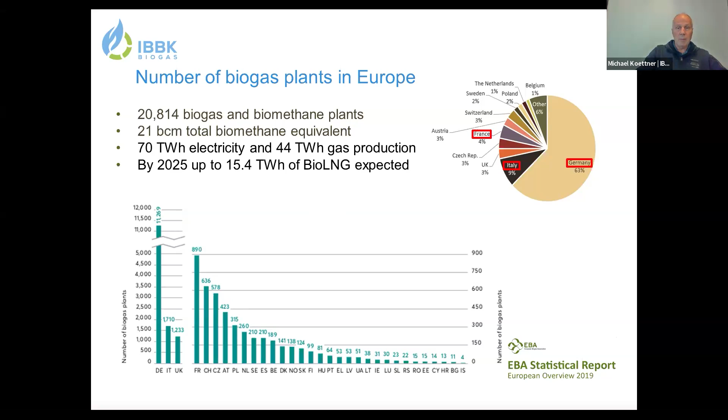So what does the feedstock look like in Europe and in the main biogas-producing countries - Germany, UK, and Italy? The feedstock mainly comes from agriculture, and then sewage sludge, then landfill, then industry. Agriculture means manure, liquid and solid manure.

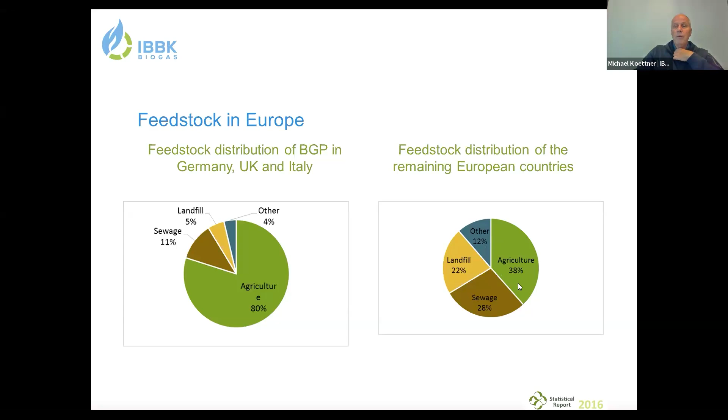But it also means energy crops. And also it means agricultural residues like straw or like byproducts or like spoiled harvests and stuff like that. So that's where most of the energy comes from, not so much in the other European countries where there is still a lower uptake of biogas, and therefore we have sewage and landfill and industry with a much bigger share, but of course the overall production is much smaller.

How does it look with the energy and the number of plants? The energy you can see here is coming from agriculture mostly, 72%. Almost 3/4 of the energy comes from agricultural resources, and in 65% of the plants, agricultural substrates are used. This is also due to the fact that we use in Germany, in Italy, in the UK especially, a lot of energy crops, a lot of high-yielding energy crops, and this is due to change.

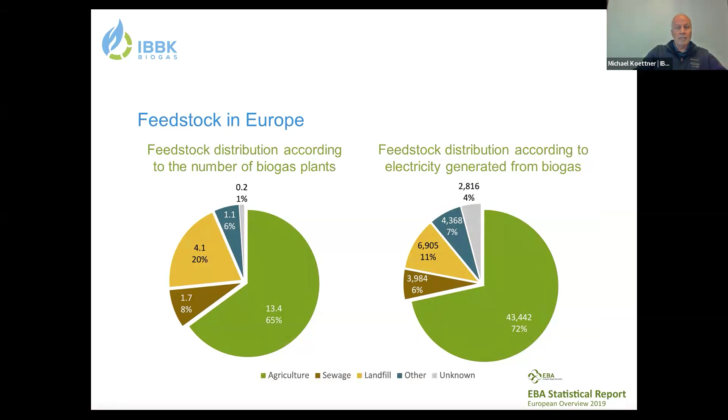And let's see what's happening next. But first, let's look at what has happened in the past. In different European countries, we had support schemes. Without that, it wouldn't have happened because electricity and gas from biogas is not yet competitive with market prices of natural gas and normal electricity. So therefore, we introduced a feed-in tariff, and in Germany that meant for 20 years you get a fixed tariff.

And of course, in the beginning, it's still good, but in the end, of course, you have higher costs, also inflation. So then it's not so suitable anymore, but also the plant is, of course, written off, so you still make good money. Also, feed-in premiums are paid. That means you have the base electricity or the base gas price, and then there's a top-up of a feed-in premium, which is then paid up to a certain threshold.

Quota systems weren't very successful with electricity production, but they seem to be more successful in the transport sector, especially in Germany. Even now we have a small problem that we have overfilled the quota, so to say, but this was due to a fraudulent influx of biodiesel from China. And it had an effect on the quota, and the quota price dropped. The price of CO2 dropped from 500 to 100. So this is 4 to 5 times less than was achieved before.

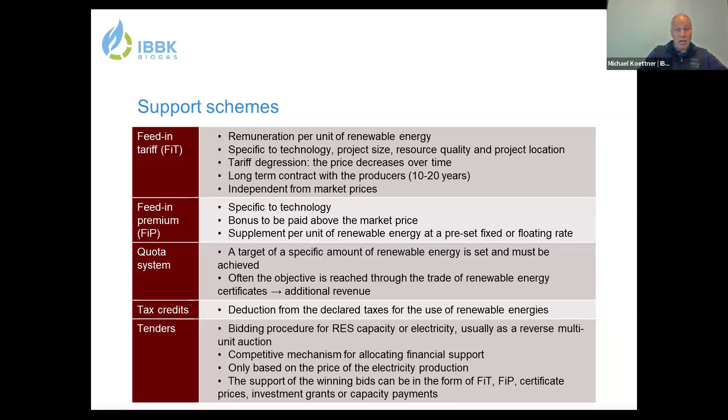In fact, we have 1,700 biogas plants at the moment which want to continue, and only about 550 were able to continue. So if nothing changes, we will have closing plants in Germany. Support schemes for biogas and biomethane were different per country. I will not go into details. You can see the different systems, and some countries have no support. Spain, for instance, has no support for biomethane, but is still a very much emerging market for biomethane. And their business model is to sell directly or sell to other markets like Switzerland and Germany.

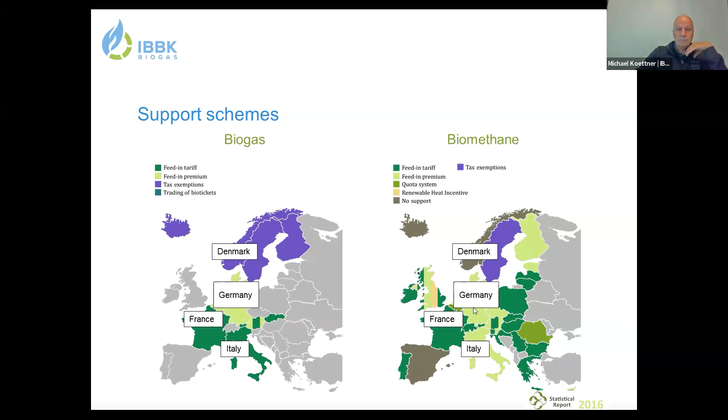Number of biogas and biomethane plants you can see here, and you can also see that biogas production is more or less stagnating since 2016, but the most increase is in the capacity of biomethane. It's actually growing at a rate of almost 20% per year. So that's good news. And the countries with the most biomethane plants are Germany, Italy, United Kingdom and France, and Denmark and Netherlands. All the other countries are still catching up or trying to organize themselves.

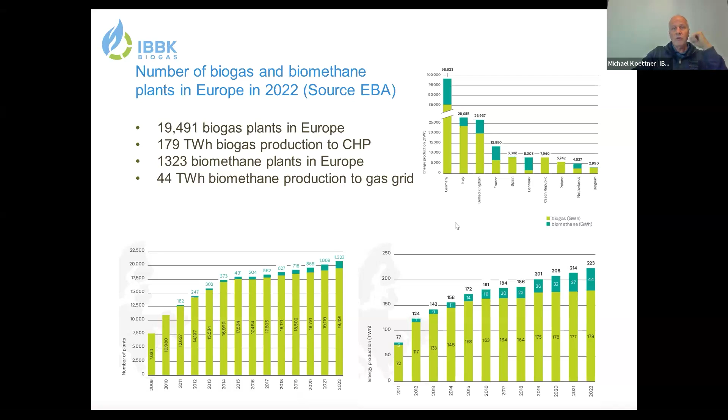Here you have an overview of where biomethane is produced in which country, and also the sizes of biomethane plants. You can see that Denmark, UK and Ireland, where there's only 1 or 2, have very big biomethane plants with 1,000 to 2,000 cubic meters per hour on average. And in France, where they have the most biomethane plants, almost 700 now, there's only an average of 200 cubic meters per hour. So very, very small plants.

They're not even catching up to Germany's 250 plants with an average of about 600 cubic meters per hour. So very small plants in France, medium-sized plants in Germany, and bigger plants in Denmark, UK, and Ireland. Emerging markets are Spain, Poland is even producing biomethane, and the Baltic states as well, even though they don't have their own support systems.

But this is due to the possibility of trading within Europe, and there's also going to be a big trading body coming up now, the so-called Union Database. A predecessor at the moment is ERGAR. That's a conjunction of different biogas registries. Those countries who already have registries are organized in ERGAR. This is Germany, Denmark, Netherlands, UK, Ireland, and Austria at the moment. All the other countries don't have registers, so therefore trade is difficult.

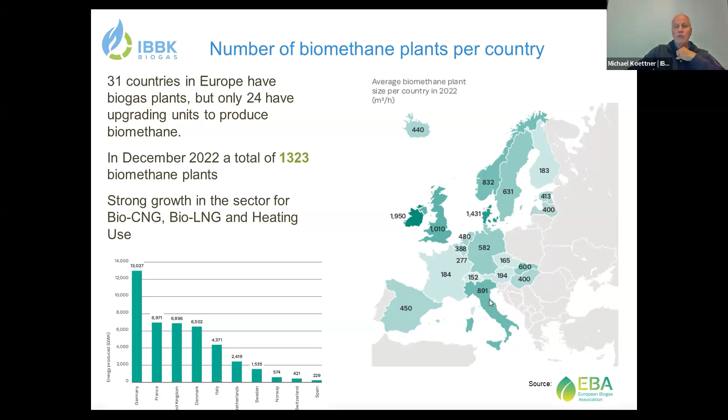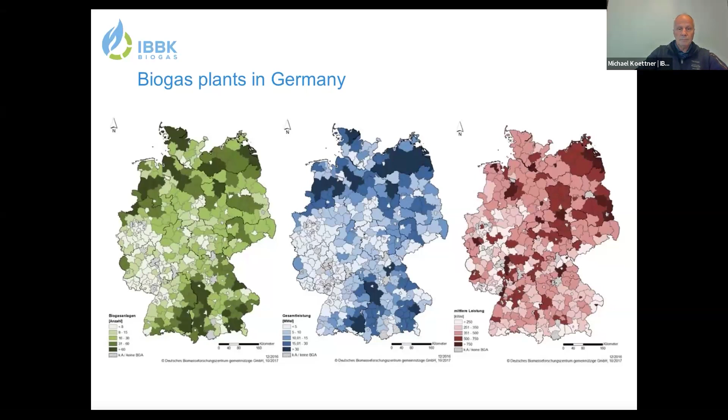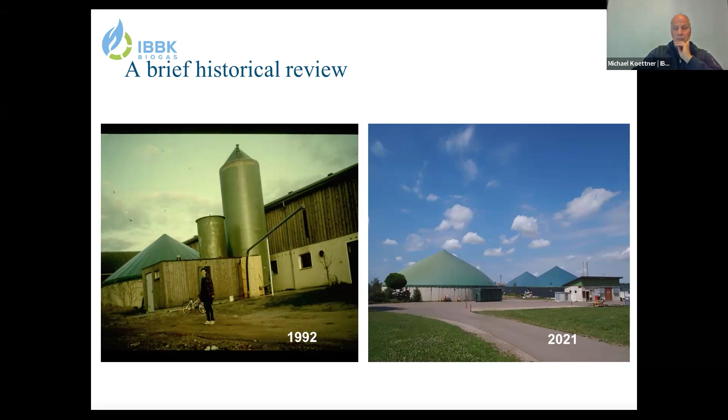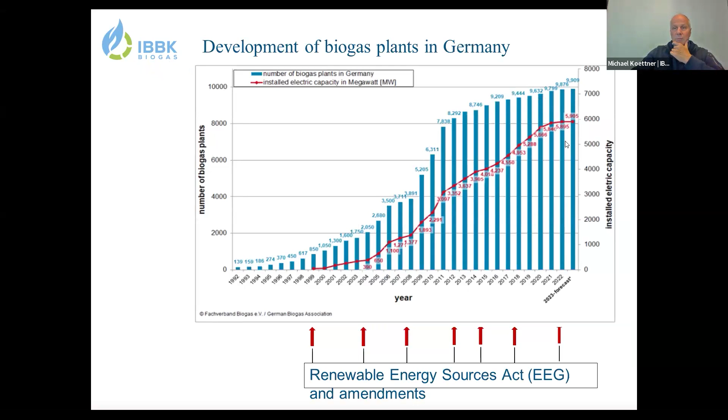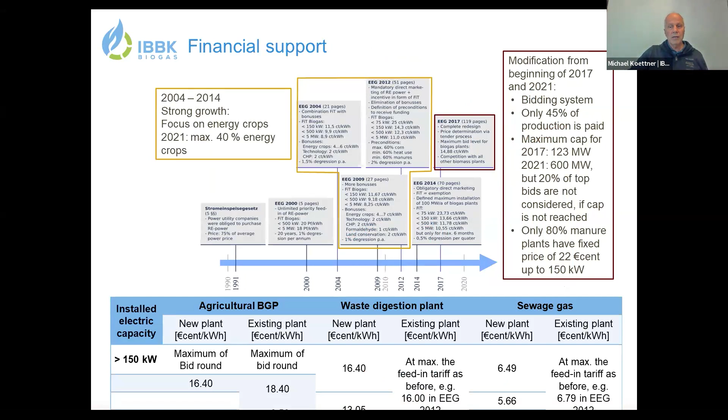There's the curve of Germany with different... there's not so much in the amount of biogas plants, but in the capacity of biogas plants. We will see later. Very complicated regulation. At first, when we started in 91, when I was just freshly coming to the Biogas Association and founding it, we had 5 paragraphs. Now we have many pages, I think 300 pages and 1,000 pages of comments. So it's become a thing of the lawyers, how to find your way through the jungle.

Not to be recommended. But interesting developments are that with electricity production, the capacity of biogas plants stayed the same, the production stayed the same, and the capacity of the engine changed. They overcapacitated. That means a lot of biogas plants have, let's say, 24/7, 500 kilowatt, and they increased double or triple. That means they have a 500 kilowatt continual production in theory, but they have a 1.5 megawatt engine. That means they produce electricity only over 8 hours.

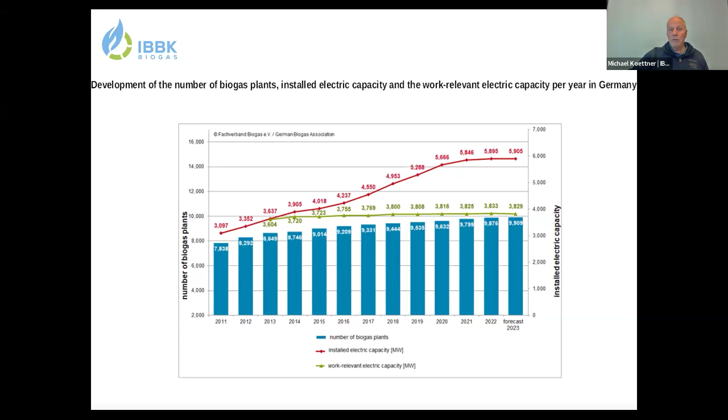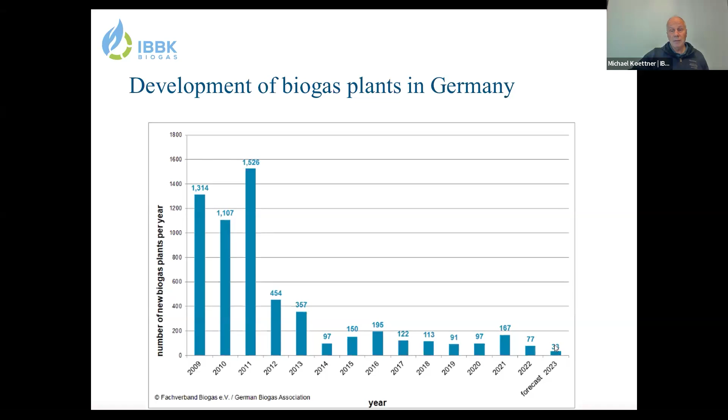So they catch the morning hours and the afternoon or evening hours when wind and solar is not producing. And that's when you make more money on top of your feed-in tariff. So that's interesting. And those who have invested today are earning really good money. They have a future, because the development of biogas plants in Germany is a bit dim. We have only 33 new plants, and also a few will be decommissioning. Still, we have a lot of jobs in the sector, 50,000. That means a lot of jobs in rural areas.

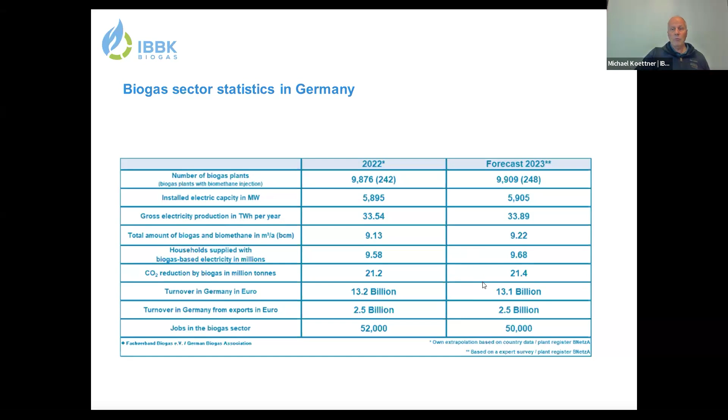We still have a lot of biomethane plants. That's without sewage sludge and landfill plants. That's why it's not 11,000, but only 9,900. That's what the counting of the German Biogas Association is all about. It's not including the sewage and the landfill. So it's an impressive industry, but we struggle because the shutdown of a lot of plants is looming, and for those who haven't invested today in flexible production, in biomethane, it's difficult to continue, and we expect that if nothing changes and they go back to 24/7 production, many plants will shut down.

Probably the scenario is not as bad as this one, but of the 11,000, we will have in the end perhaps 6 or 7,000. But what could happen is that bigger plants join together, and we hope this is happening. And also we hope and count on the innovation power of biogas in Germany.

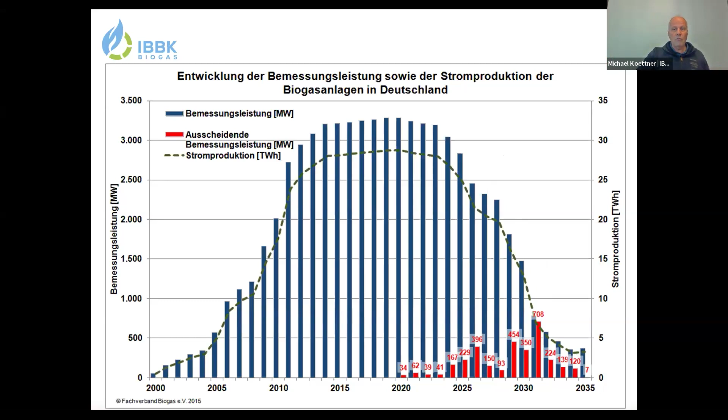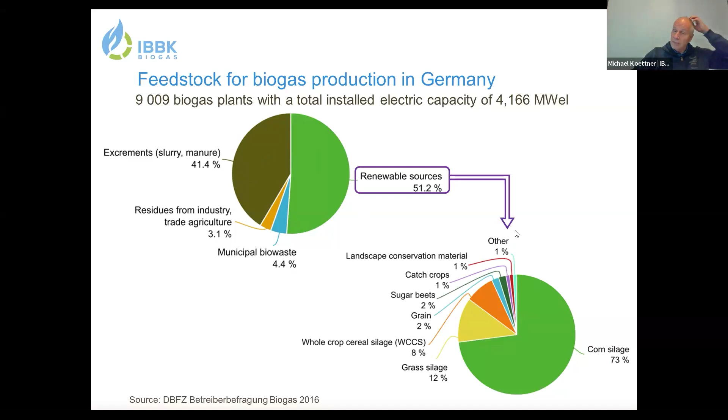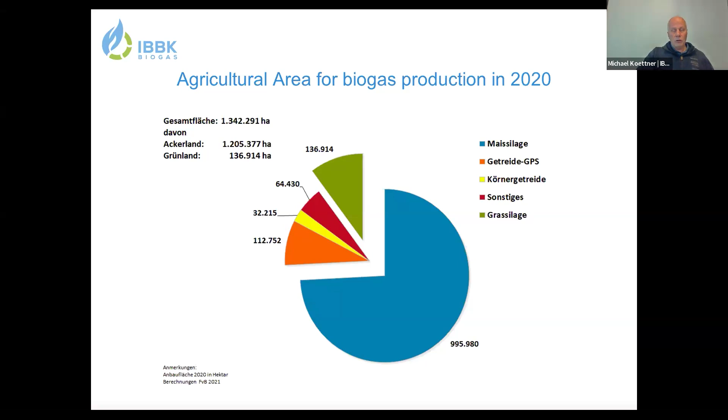Change of feedstock is crucial. More excrements, less energy crops, less corn silage. We still have almost 1.4 million hectares in energy crop production, and mostly it's maize. So there is a maize cap for the future as well. And yeah, this needs to change. New plants are only allowed to use 35% maize, and as from the 1st of January 2026, only 30%. So this is going to be the future, that we have low carbon feedstock, and carbon will be the future value of biogas and not the feed-in tariff.

Small conclusion: the biogas situation is changing due to new national legislation. Energy crops are becoming less economically feasible; replacement by sustainable feedstock, not only manure and residues, but also alternative feedstock which fixes nitrogen and CO2 in the soil, is important in the future.

But also we will focus on different ways of marketing the AD products, biogas and digestate: flexible production of electricity, biomethane as a biofuel for transportation and direct heating, and also raw biogas, not only for electricity production, but for alternative use pathways. And of course, AD technology is always the solution for manure and biowaste treatment.

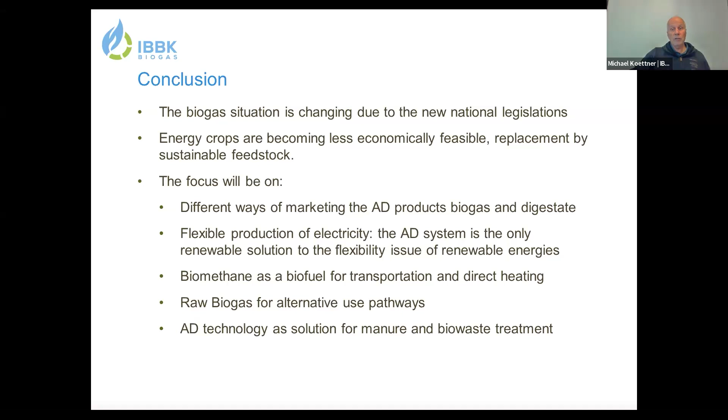Someone is asking if there's a possibility that some of the German plants that are no longer viable for electricity production could instead switch to green hydrogen, under the assumption that they are aggregated or used as BTM applications. Well, that's what's happening at the moment. Those who can switch over to green gas production, not only biomethane, of course. Biomethane is quite easy. You inject it into the grid.

Biohydrogen, yes, this is possible. At the moment, there's one plant which is doing the conversion of biogas to biohydrogen through steam reforming. Still, we have a lot of CO2 emissions through steam reforming. This is not the optimal case. IBBK is working with an international consortium on a Horizon Europe project on a possibility to produce biohydrogen and solid carbon. So we fix the carbon and do not emit it into the atmosphere. So these are possibilities to be explored in the future.

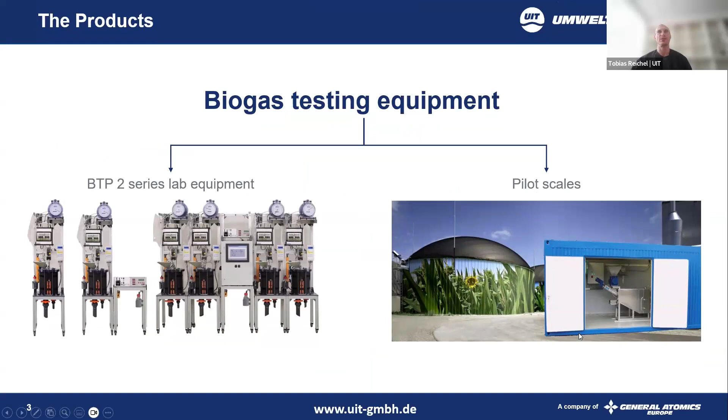On the other hand, the other thing that we present is pilot scale. So we not only do the lab scale, but we also do the pilot scale. And so we started just like IBBK in 2000. UIT existed a little bit before that, but in 2000 we started going into the biogas test plant market because there was a lot of demand there.

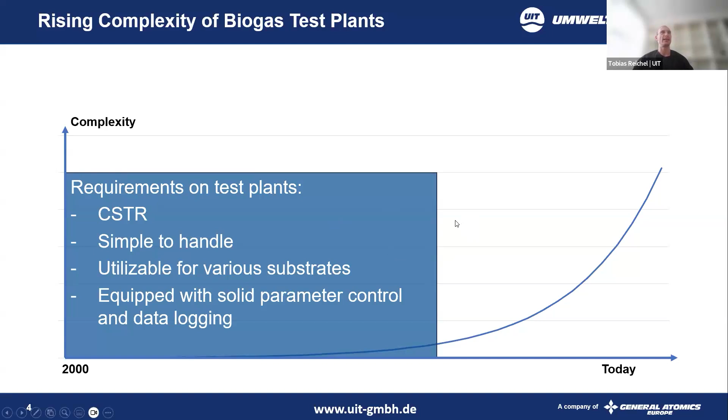At first it was a lot of continuous stirred tank reactors. They were fairly simple to handle. They had to be utilizable for various substrates, and they had to be equipped with good and solid parameter control and data logging. Those were the requirements in the first days of biogas testing, and it continued to be more complex from there on.

Our BTP 2 got to be the standard in biogas testing. It was applied in university and industrial research. There were a lot of projects done with those plants, and we still see them being used all over the world. And the trend that we're seeing is that the tests that were done some years back in Germany are now done in other countries where the development is not that far. So those plants are still relevant, but a little bit more outside of Europe.

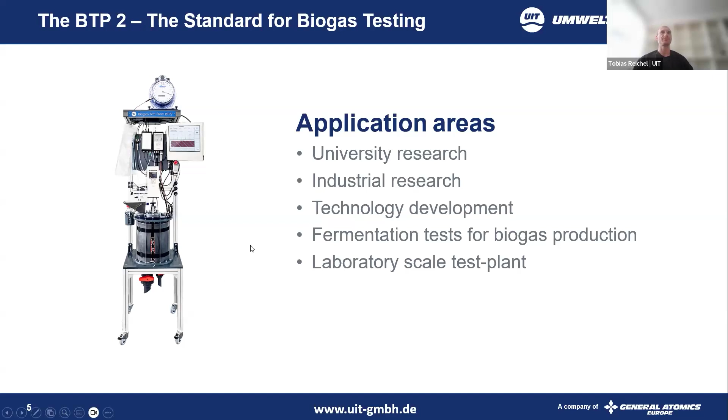The plant normally is equipped with standard equipment. You have, like I said, a continuous stirred tank reactor. You have a pH sensor. You have a mixer unit. You have a gas meter, so you can basically log and control all the data that comes out.

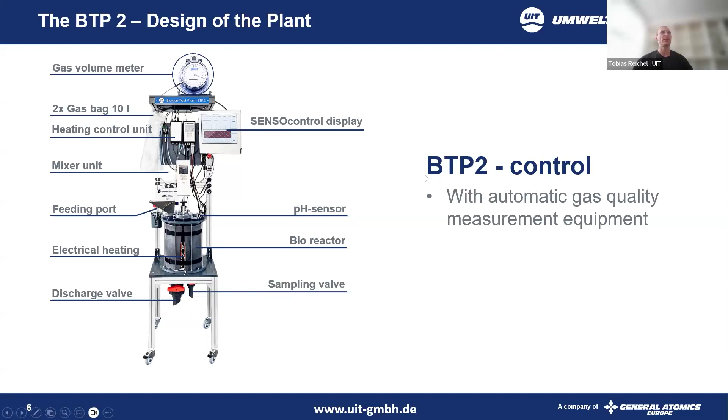The unit has a control panel. It's equipped with the SENSOcontrol, which is the controlling software behind the whole system. It comes in handy for all of the relevant parameters, controlling them and logging them.

Because we saw a lot of development when it comes to scaling the process of biogas production, we designed the plant so it would be easily scalable. You can see we even go up to the 1 cubic meter, or 1,000 liter, scale size.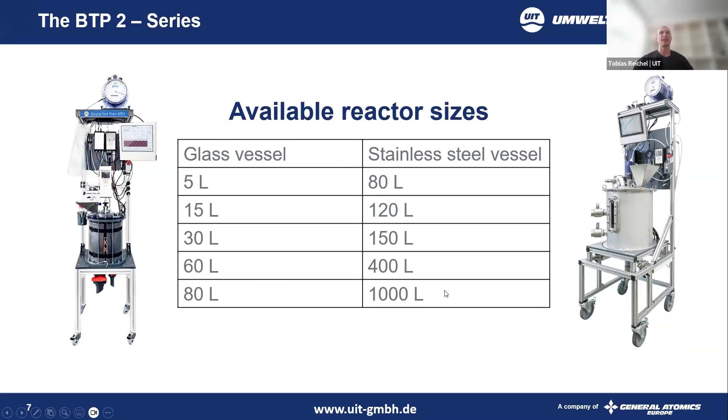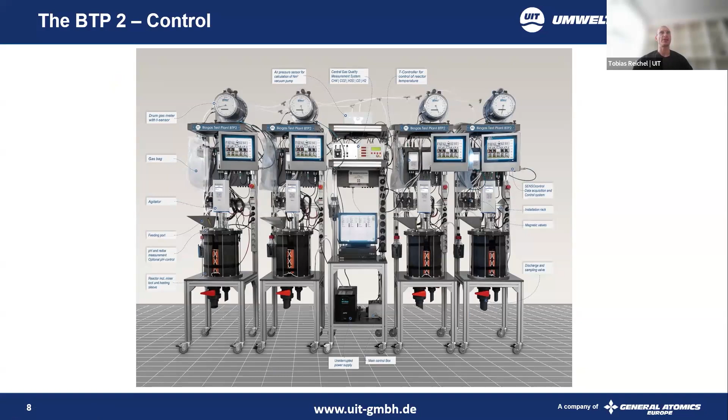This is also another overview of the different instruments attached to the plant. After a certain time, we expanded on the basic concept of the plant and added gas quality measurement, where you can log all the different gas parameters like methane, CO2, H2S, oxygen, and hydrogen. Some of our customers had different requirements.

They needed special feeding and discharge systems. So we attached a system equipped with eccentric screw pumps to feed in different and various substrates, to realize different flow rates and particle sizes.

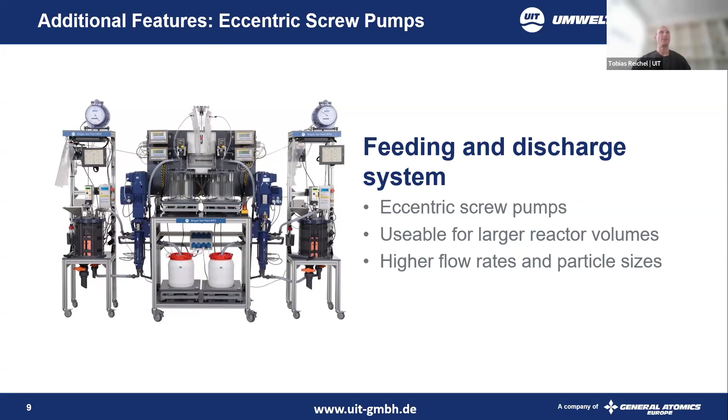All of those were tested in Germany. And we also see that this is now a thing that's happening in the market outside of Germany, where a lot of those tests are still run. So this is still a relevant system, especially outside of Germany.

In the following years, after the first period, we saw the demand for scalable reactor designs. We also saw the first methanizations and simple methanization tests being run, along with different and more complex substrates. Customers started demanding more customizable data parameters for the data logging system.

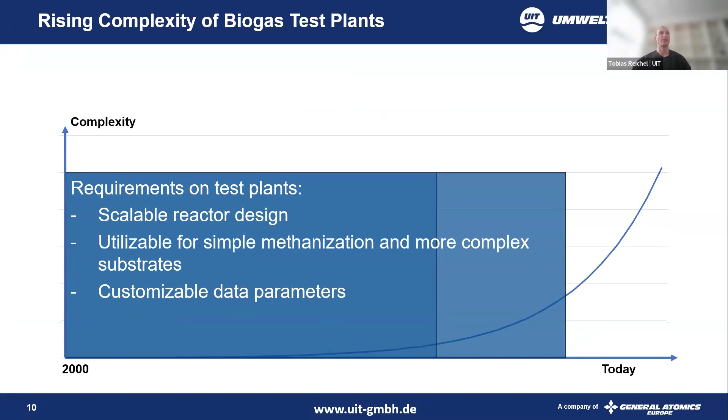So we went on and created a new standard, which is the BTP2 with the 400 liter reactor volume, to make more scalable tests within those sizes, and have a standardized reactor geometry for this size.

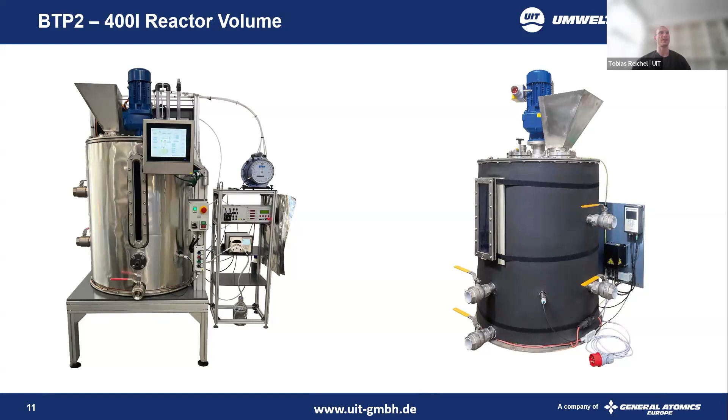A lot of customers stayed with us. They made their first tests with our plants, and then ran up to larger volumes. You can see a plant here that we designed, which had 5 reactors with a volume of 1,000 liters.

So we saw a lot of scale-up being done, from our initial systems up to plant-sized, technical scale plant size.

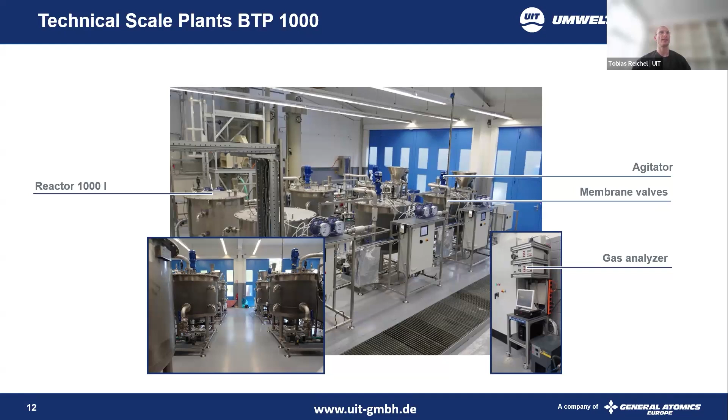Since a lot of our customers also needed the plants to be mobile, so you can do testing in the field, maybe where the feedstock comes from, from different feedstock locations and sources, we equipped container-based plants with our systems. You can see one here that's being transported around and tested for different feedstocks.

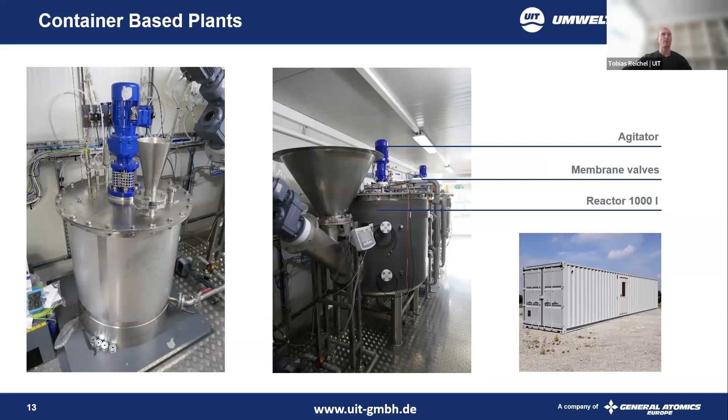This is also a demand that we see a lot in Southern Europe, for example in Spain, where some of those containers are located right now.

We also had different and more complex requirements, for instance dry fermentation, where it was tested to feed different dry feedstocks into the fermentation plant. It was then equipped with a conveyor screw system, so the more demanding feedstock could be fed into the reactor, along with our standard gas equipment and gas quantity measurement systems.

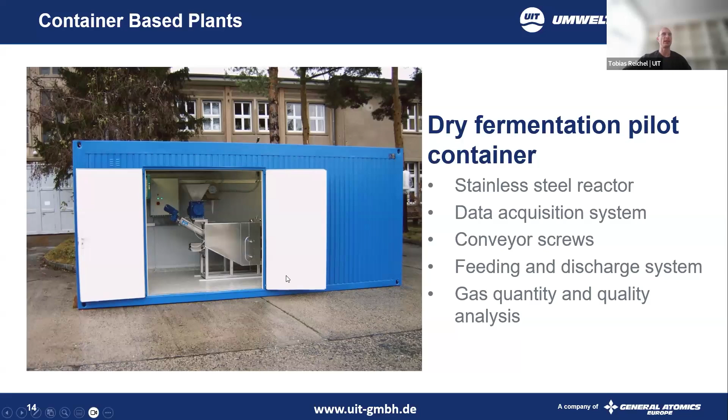And this is actually in front of our construction site here.

We continued to build different containerized plants. You can see one here where the feedstock is afterwards dried with a press, with a chamber filter press, and the whole plant is equipped with some laboratory equipment.

This one was also built into a container.

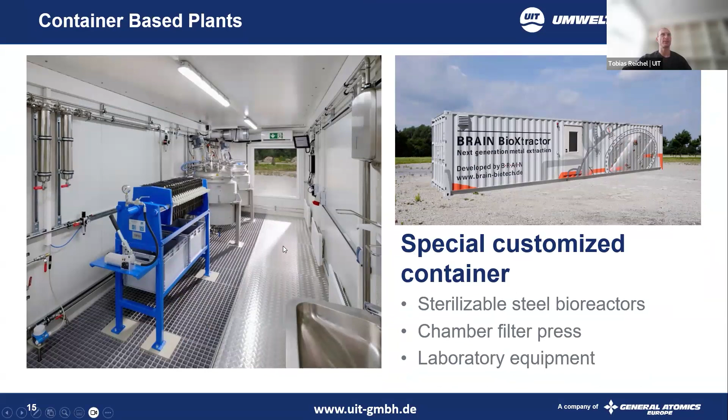Now we come to the present day, to the demands that we see right now for biogas test plants. At the moment, we see a lot of very, very complex substrates being either dry or mixed substrates.

We also see that the requirements for methanizations grew. People are trying different methods, different biomethanization methods. We also see that some of the processes now use pressurized vessels. We see a lot of hydrogen utilization, and different new operation modes for the reactors.

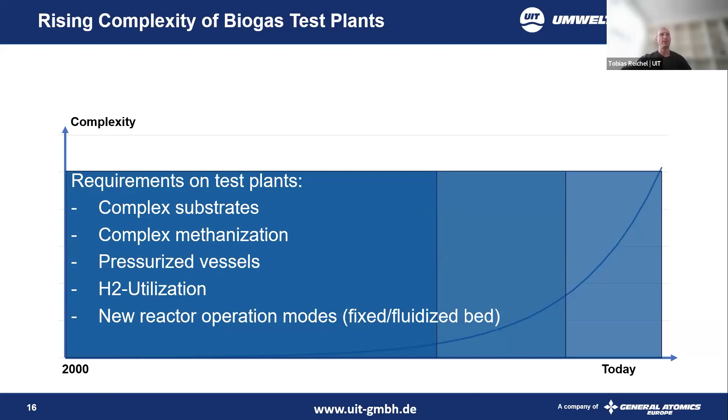For a lot of things, we see fixed or fluidized bed reactors, so more complex reactor designs being tested in order to further optimize the biogas or biomethane production. I have some examples of those here.

On the left-hand side, you see a biomethanization test plant that we built for the university in Rostock. So this is actually a development that's being done right now.

It's two reactors being fed with different substrates. One of them is doing the biogas fermentation, one of them is doing the methanization. On the right hand you see an image of the HyPerFerment project done by the Fraunhofer IFF, a huge part of Germany's research infrastructure. They did tests on dark fermentation in order to produce green hydrogen, tried to optimize the fermentation within this plant, and prepared for scale up. Right now they're in the second phase, HyPerFerment 2, having successfully conducted their experiments and now scaling up to pilot or even technical size.

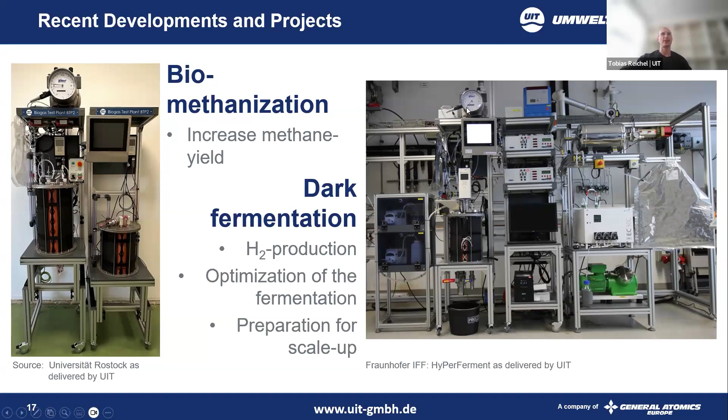So yeah, this project is already done and they're moving on to the next step. Another project we did was at the Fachhochschule Münster, FH Münster. It's called HyMAT, a project where they tried to utilize a substrate over two stages. They first fed the substrate into a dark fermentation reactor, the smaller one installed in the rack, and then the substrate after the dark fermentation stage was pumped into the biogas reactor to produce biogas from the leftover feedstock. This was also done a while back, and it went on to being realized in a larger plant.

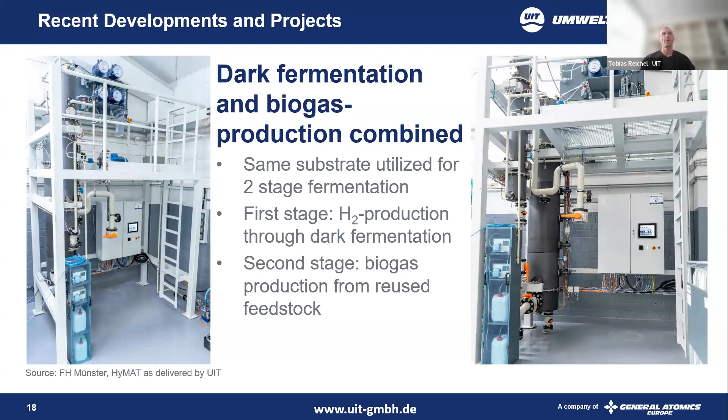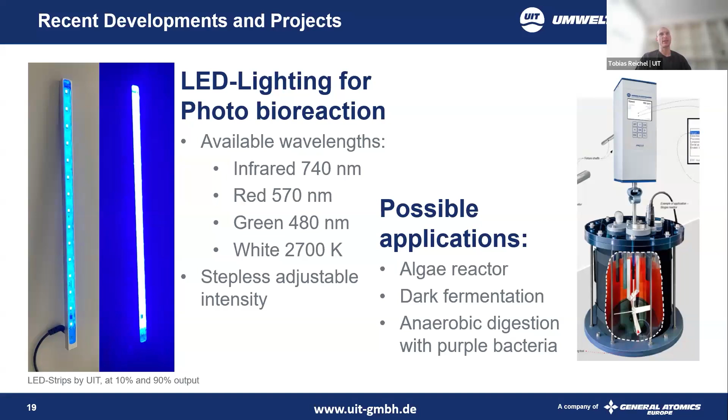Now for a more recent one, we see the demand for photobioreactors, which is actually a bit more complicated. So we're designing LED lighting strips for the lighting of the reactors. We're currently realizing 4 different lighting types: 3 different wavelengths with infrared, red, and green lights, and also white lights at 2700 Kelvin. We also need those LED strips to be adjustable, steplessly adjustable. The applications we're seeing at the moment are algae reactors, some dark fermentation, and also some anaerobic digestion with purple bacteria.

Another project currently running is the Pilot-SBG at the DBFZ, the German Biomass Research Center. They're testing a whole variety of different substrates, some agricultural, some urban waste as feedstocks. It's a fairly complex design for a plant. They have a huge feedstock preparation, some hydrothermal processing of the feedstocks, then the anaerobic digestion, then catalytic methanization, and then the post-processing of various byproducts. And yeah, we realized this plant.

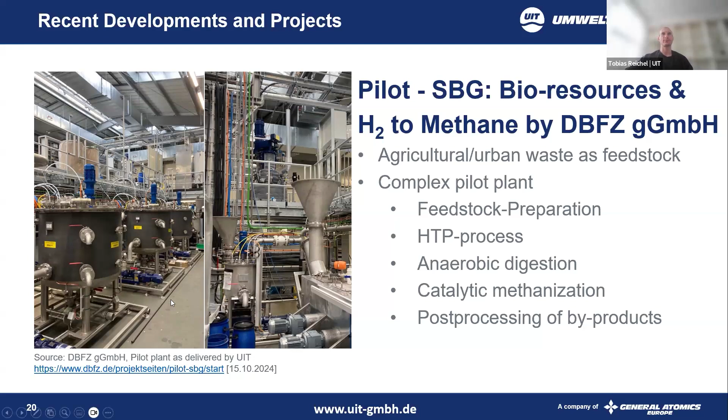So as you see, we did a lot of different biogas test plants. We are in contact with a lot of research groups all over the world. The takeaway message from this presentation, I guess, should be that Germany has a few years' head start on most other biogas testing and biogas markets. The trend we're seeing here in Germany is that the applications and requirements get more complex. As Michael also said, we're seeing a lot of biomethane being produced, some green hydrogen being produced, and we see that all of the processes get more complex.

And I think this will continue into the rest of the world. The German market keeps on growing as we see the demand for more biomethane. So yeah, this is actually the trend at the moment.

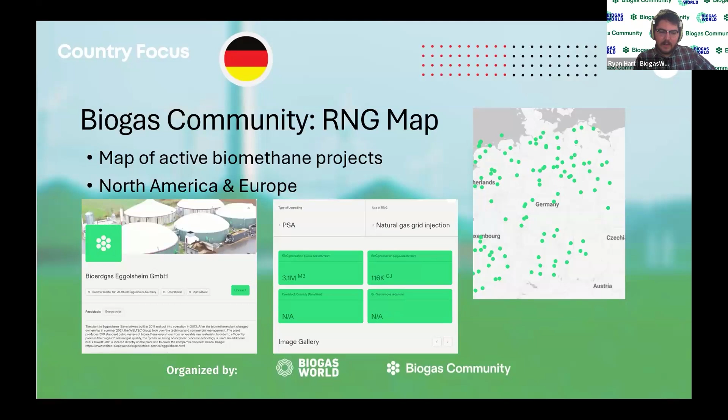First is our biomethane map, featuring an overview of biomethane projects in various countries. The map features the location of projects where available, some information about the type and quantity of feedstocks processed, the type of upgrading technology, the amount of biomethane produced, and the greenhouse gas emissions reductions as a result of utilizing the biomethane. The map is continually being updated and expanded upon to include more projects and new markets. The map can be accessed for free from our biogas community website.

The second is our annual showcase report, which features 45 successful biogas and biomethane projects and contact information for more than 30 industry leaders. The showcase report can be accessed for free by following the QR code on this slide. I have a few examples to quickly share from the showcase report of successful projects completed by some German companies.

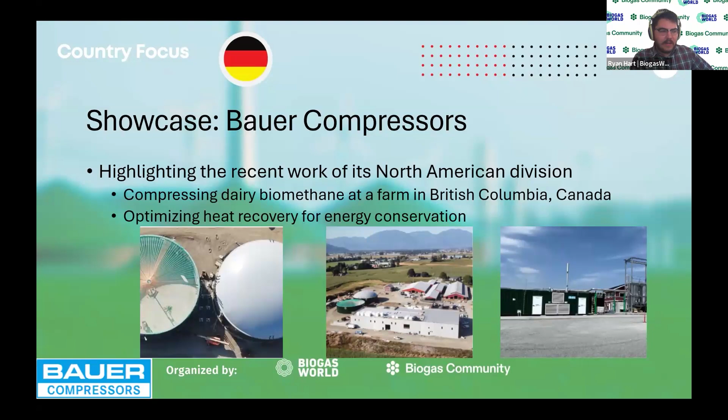Bauer Compressors highlights the work of their North American division, particularly a dairy farm in Western Canada, where 500 normal cubic meters per hour of biomethane is injected into the local gas grid. The project notably features technology with optimal heat recovery, reducing the energy demand of the site.

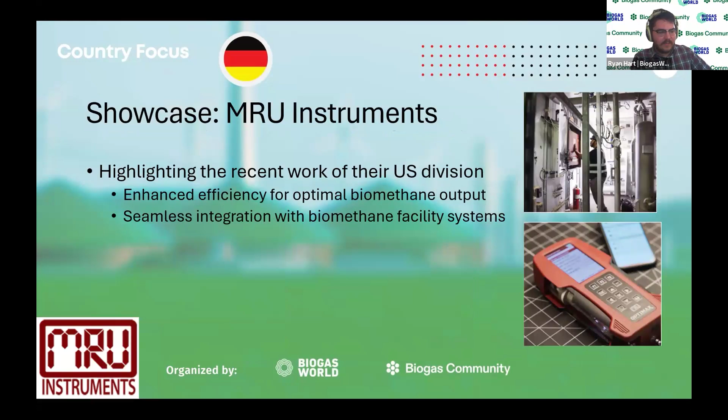MRU Instruments highlights the work of their American division, supplying high-performance biogas analyzers to biogas facilities across the U.S., improving facility efficiency and optimizing biomethane output. MRU analyzers integrate seamlessly with new or existing facility infrastructure.

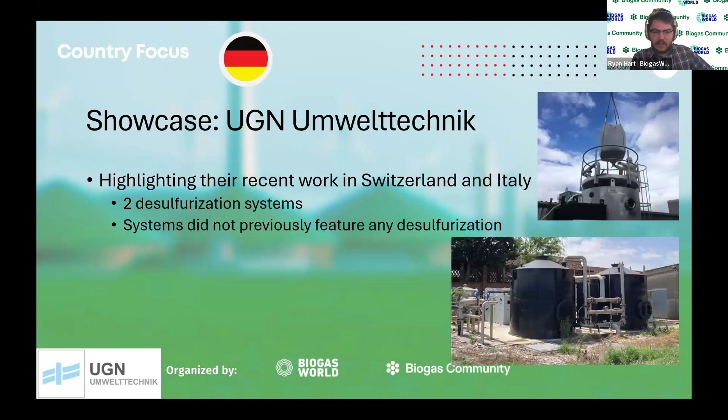UGN highlights some of their recent work installing desulfurization equipment at 2 sites in Switzerland and Italy. The UGN team provides a range of services from consulting, process concept planning, to the construction, filter materials, and operation.

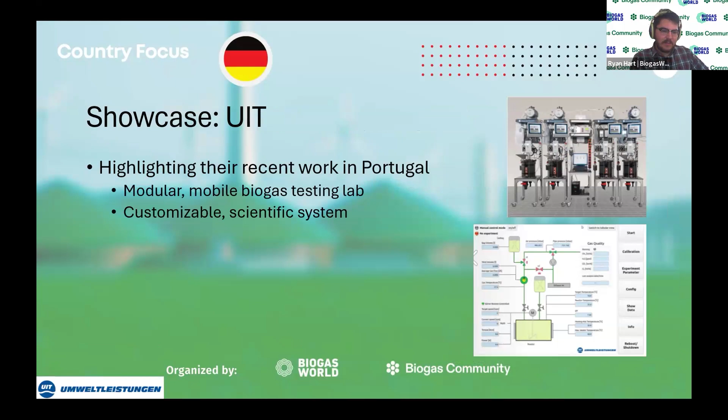UIT highlights some of their recent work for the Vila Real campus in Portugal. UIT supplied a modular biogas testing plant for continual monitoring and control of the system. The lab was fully customizable and featured control systems and data collection for each individual reactor.

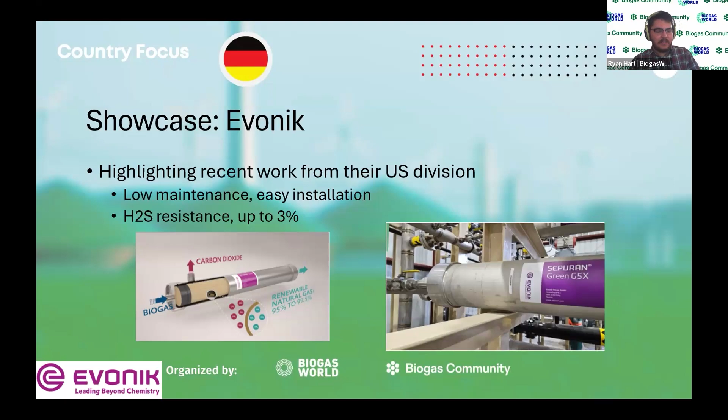So first, maybe to Michael. So in the future, what are options for after the feed-in tariffs? So for the price of biomethane, and what can influence that price?

Well, so the feed-in tariffs are only for electricity, not for biomethane. So the biomethane still goes into electricity production, but also heat production. Often biogas plants are built in locations where there's no heat utilization possible, because we have a CHP unit, and CHP units have 40% electricity efficiency and 40% or 45% heat. Often the heat is not completely used in rural areas, but in areas where there's a lot of heat use, you have biomethane CHP units, and there you can also make money from electricity selling and heat selling as well. So that's the main thing.

Still, 80% of our biomethane goes to that. About 15% of our other biomethane goes into road transport, and about 4% goes into heating buildings, and about 1% is to be traded internationally. So these are the possibilities, and there you can inject the biomethane into the grid, for those plants that don't have a possibility to continue with their electricity production and are next to a gas network. In Germany, a lot of gas pipes are in the ground. Then you are able to connect to the gas network and produce biomethane.